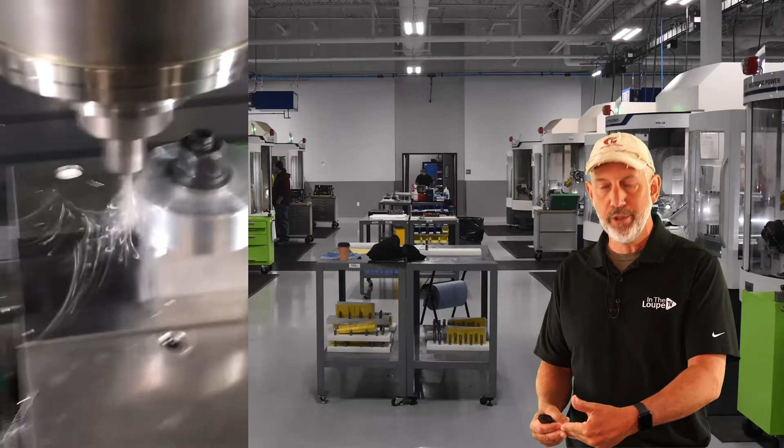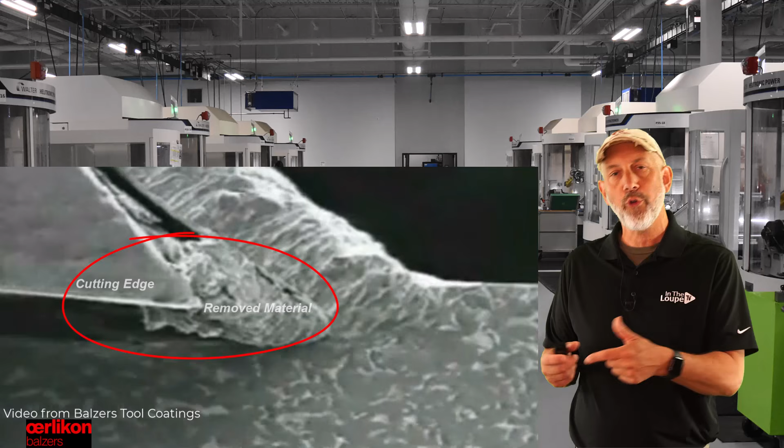It's very common. Basically, built up edge is when you're actually cutting a material with an end mill, a drill, a reamer, an indexable tool - it applies to everything, all kinds of materials. The material that you're cutting wants to weld itself or stick to the cutting edge. It's a huge problem and it's very detrimental to finishes and to tool life. And if we don't prevent it, we're gonna have a lot of problems. So understand, built up edge is where the material we're cutting wants to weld itself or stick to the original cutting edge of your tool, and therefore start building its own cutting edge that's not going to be conducive to giving you a good part, good finish, or long tool life. That's what built up edge is.

We're calling it B.U.E. for this episode. Okay, so what materials - you saw at the beginning of this, I asked everybody what kind of materials are you dealing with in your shop. It's good to understand this. So what types of materials, because it is a little specific, are more prone to getting built up edge? Well, these are your ductile materials, your soft, your gummy materials, and I'm going to run through a few of them.

Number one is aluminum, right? Aluminum, some of your 6000 series and stuff like that is going to be prone to built up edge. Your coppers, your 304 stainlesses when you start getting into steels, your nickels, your titaniums that aren't in the hardened state. The gummier, the more ductile the material is, the more it's going to be prone to sticking to the cutting edge. Think about that - I said gummy, ductile, softer. It's going to want to stick to the cutting edge.

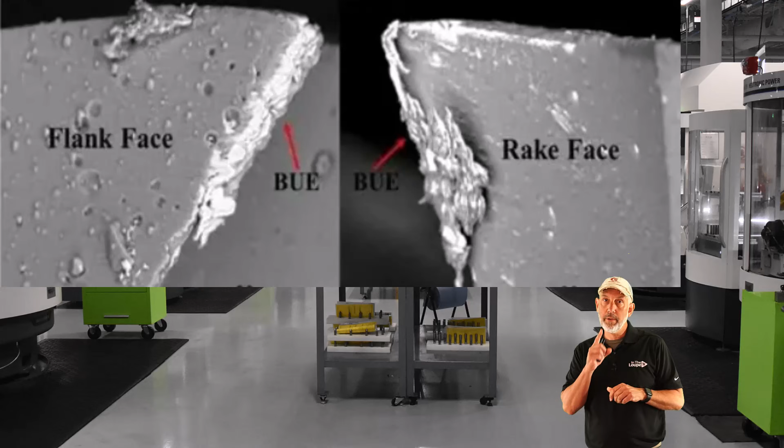So look at those types of materials if you're running them to kind of run through the process that we're going to run through today, to say: is built up edge a problem, and how do I need to prevent this? Because I am running one of those materials that's a little bit softer, a little bit gummier, and it's going to be conducive to getting a little bit more built up edge than some of these other materials. So just keep that in mind as we walk through how we combat this.

So how do you determine if you have a built up edge problem? Well, here's something I wanted to bring up to everybody - this is the things that I have to do at the spindle, which is why I teach you folks out there so you can learn the same stuff that I apply. So how do we know that built up edge is a problem?

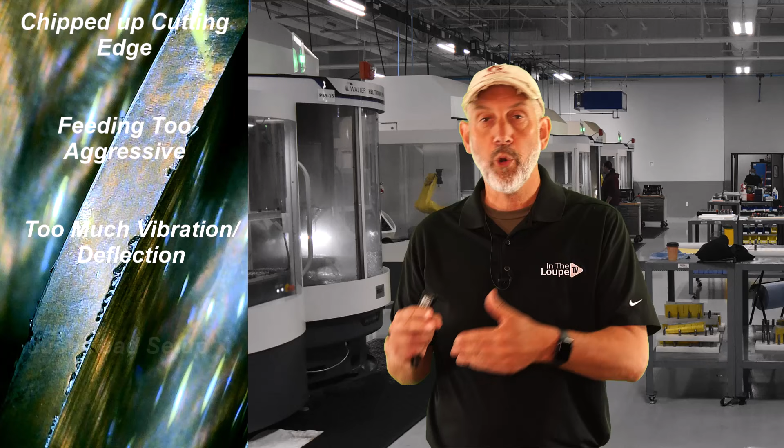Built-up edge disguises itself, folks. If you pull a tool out, it's very hard to tell if built-up edge was the issue. And you know what it disguises itself with? A chipped up cutting edge. If you pull a tool out of the spindle and look at it and it's got chipping down the cutting edge, what do you think right away? You think you're either feeding it too fast, you've got too much vibration in your spindle, or something's not set up right. That's not always the case.

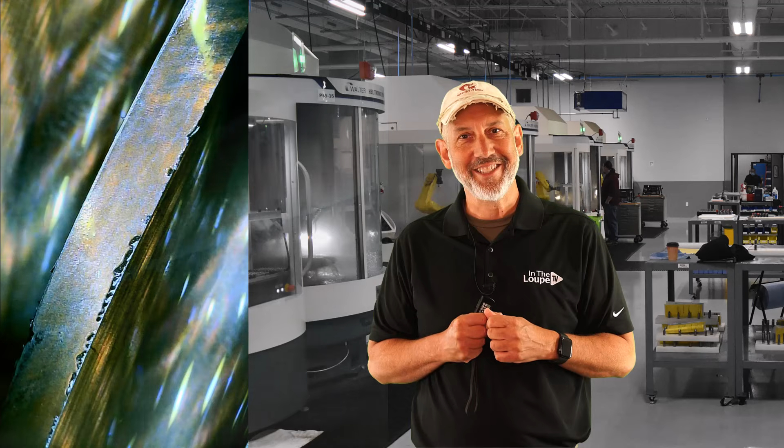You could be having built-up edge problems, and when that edge builds up so high, that material is going to flake off eventually of the cutting edge, and guess what it takes with it? It takes the cutting edge off. So if you wait with built-up edge till end of life, you might not know that you actually have a built-up edge problem.

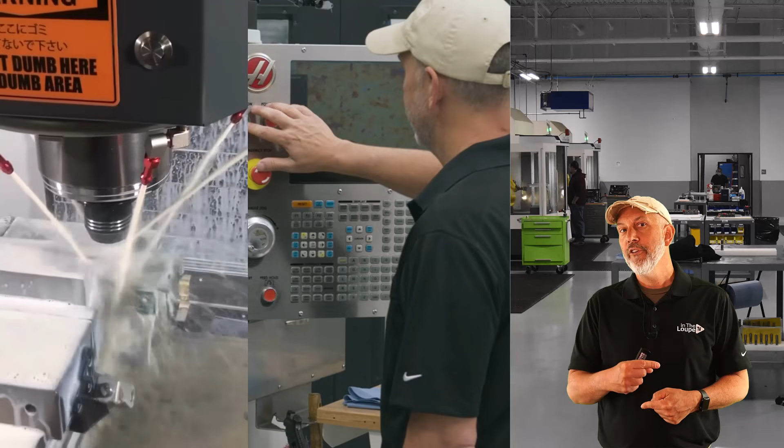The only way to determine if you have a built-up edge problem in your spindle, if you're running one of these materials that's prone to built-up edge, is you need to run for 5 minutes and pull that tool and look at it to see if it's starting to get built-up edge. If it's clean, put it back on the spindle. Run it again for another 5-10 minutes, look at it again. What you're trying to do is find out if there's a built-up edge problem before you run that tool to life and the whole cutting edge is chipped out.

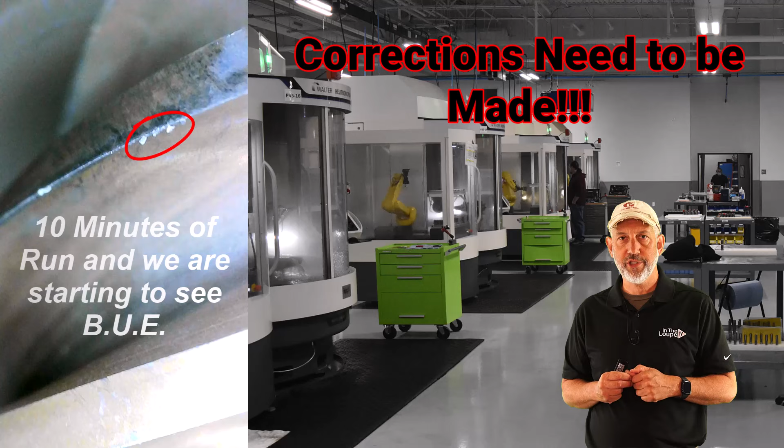We do it all the time when we're not aware whether or not built-up edge is causing our cutting edge to chip. We have to do it in segments. Pull that tool out, look at it about every 5-10 minutes of life, and see if there's material starting to stick to the cutting edge. This way, at end of life, when it's chipped out, you'll know that built-up edge was a problem.

So now let's talk about how do we fix that. How do we eliminate built-up edge at the spindle? Let's talk about some features on the cutting tool, and this applies across all cutting tools, that does not help built-up edge or is more prone to get you more built-up edge.

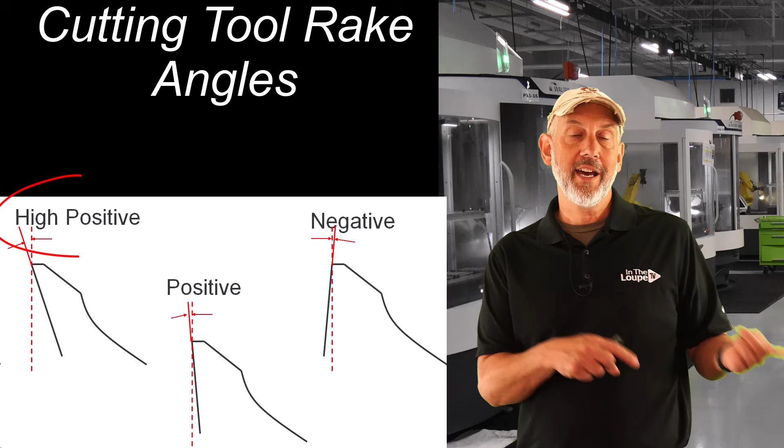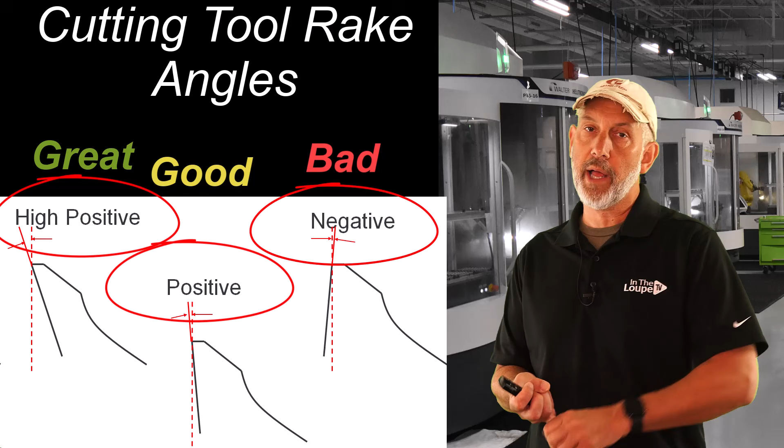Number one is rake angles on the tool. Geometry on the tool can either prevent or bring in built-up edge. So when you're running these gummy materials and you don't want built-up edge, you've got to look at material-specific end mills, drills, cutting tools - always the best way to go because they're designed for the material. You're looking at rake angles, you want it shear sharp. If you get a blunt edge or a flat rake angle, you're going to get more built-up edge. Plowing's not good - plowing's going to be conducive to built-up edge.

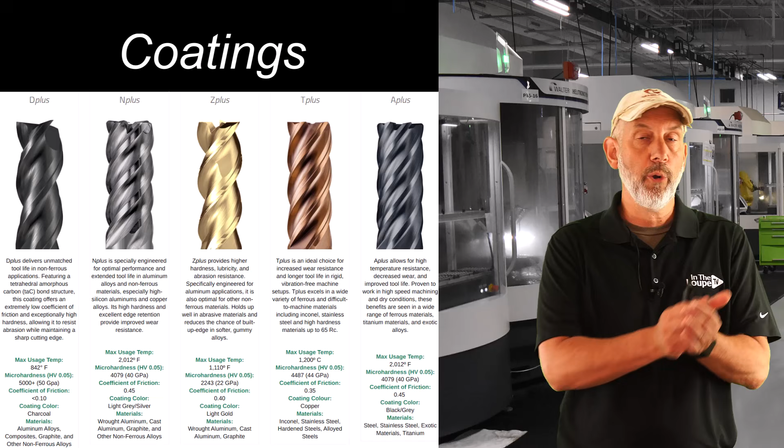Flute finish - what is that flute finish like? Built-up edge wants to stick to the material, right? It's not going to stick to the material if it's slicker than snot on a marble. If that's a really slick cutting edge, a slick flute, it's not going to stick to the material. Coatings - you have to have the right coatings for the right materials to build up that barrier that doesn't create that chemical reaction so that material welds to the cutting edge.

So the right coating is very important to put on your cutting tools to reduce built-up edge. Coolant, lubricity, MQL - always go with a coolant, especially in aluminums and stuff like that. Make sure you're using coolant, concentration is high enough, and if you add coolant in the right places and the right concentrations, it will help prevent built-up edge. So the first thing I'd say to reduce built-up edge, before we get into what you can do at the spindle - and trust me, I got some tips here, stick around - the best thing you can do is make sure you get material-specific end mills that have the right geometry that combats and stops the built-up edge from the beginning.

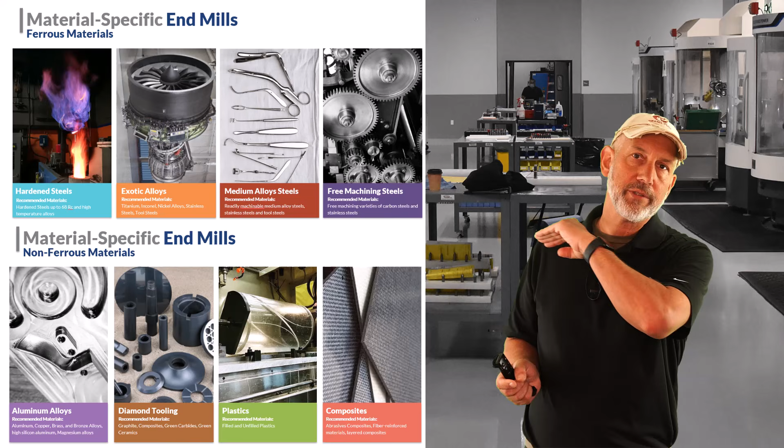But if you didn't get the right geometry, are there things you can do at the spindle? You would think right away, heat, right? If we have too much heat with the ductile material, we are going to create built-up edge. Believe it or not, raising the surface foot, getting more heat into your cutting edge when you have built-up edge, softens the material, anneals it, and lets it slide off the cutting edge. The danger zone with built-up edge is the middle surface foot. The lower is not productive - you don't want to be at the lower surface foot.

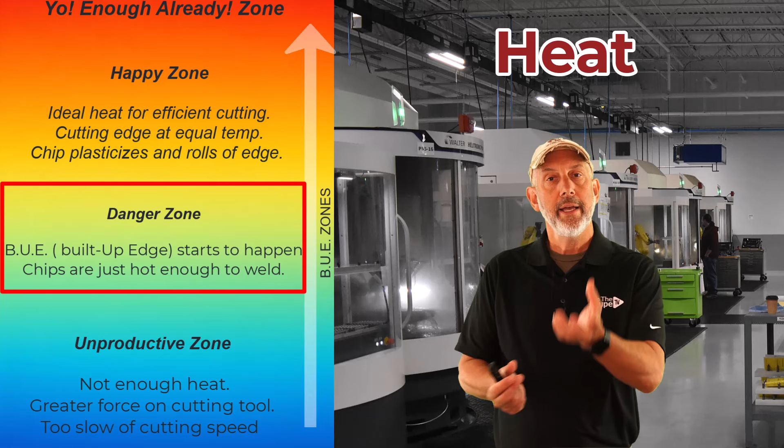The middle surface foot, where you're not at the right temperature with ductile materials, is where you're going to get that built-up edge. So what you need to do is bring your surface foot up. You anneal your chip, you get it softer, and when it's softer it slides off the cutting edge, eliminating built-up edge. So be mindful, don't bring the surface foot down, bring it up, and that's going to help prevent built-up edge. Got a little example I'm going to show you right now.

You might be saying to yourself, heat? If I get it hotter, it's going to weld to the cutting edge. Here's a perfect example, and I want to give a shout out to a gentleman named Joel Radner. He's actually my boss, but a very smart, intelligent cutting tool guy. He said this is a perfect example of how to combat built-up edge.

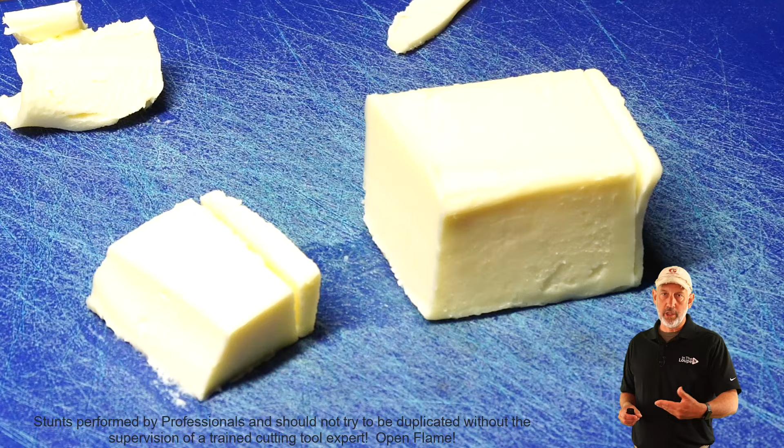If we take a look at this piece of butter - butter is a perfect example, it's a little colder, a little softer - and we take a butter knife like this. When I put this in the butter and pull the knife out, what happens? Now the knife is cold, so the butter wants to stick to that cutting edge, or the knife in this case. That's kind of similar to what you're going to get if you don't have the right temperature.

Now let me take that same stick of butter, and let me take this knife and heat it up a little bit. I'm going to put a little bit of flame on this, kind of heat it up. I'll speed it up a little bit.

Now when I get the knife hot - yeah, it's turning a little black, it's a thinner knife - when I get it hot and put it in the butter and pull it out, what just happened? You see how the butter didn't weld itself to the knife because I put heat into it. I made the material around it softer, therefore it did not stick to the knife.

That's a great example, isn't it? Shout out to Joel Radner again. That's kind of what's happening when you're actually getting built-up edge. Bring the temperature up at the cutting edge, soften the material around it, let it flow off that material, and you're going to be in really good shape to help eliminate built-up edge in all those materials.

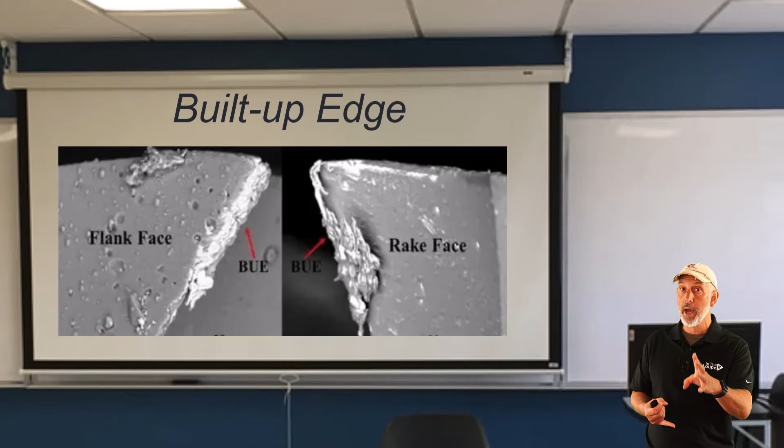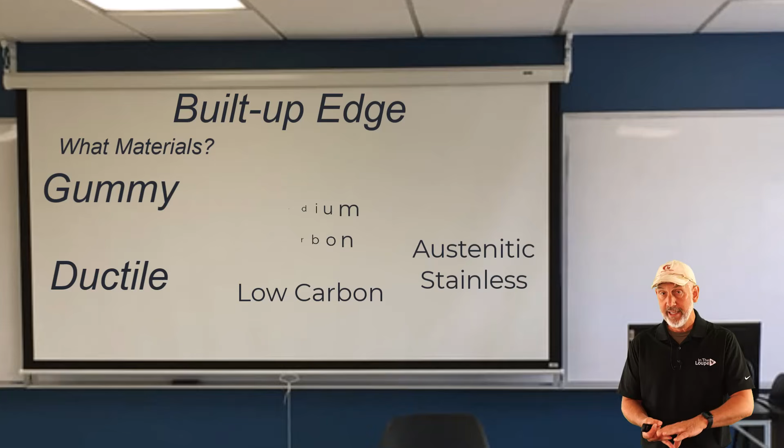So folks, it's recap time - it's been a while since I've done that. What we're talking about is built-up edge. It's a big problem with cutting tools, it doesn't give you the tool life you need. What materials have built-up edge? Well, it's your gummy materials, your ductile materials - aluminums, coppers, 1018s, medium carbons, low carbons, 300 series stainless, titaniums, nickel alloys in the softer state. That stuff wants to weld to the cutting edge.

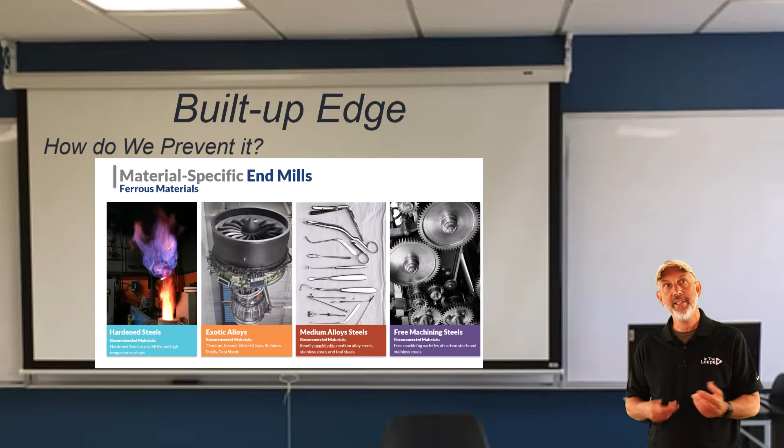How do we prevent it? Well, number one, make sure you've got the right geometry. Material-specific design gives you the right rake angles, the right coating, the right geometry - that's going to prevent built-up edge. If you still get built-up edge, what do you do? Well, we need to definitely bring the heat up at the cutting edge. Bring your surface foot up, plasticize that chip, get it a little softer, let it roll off.

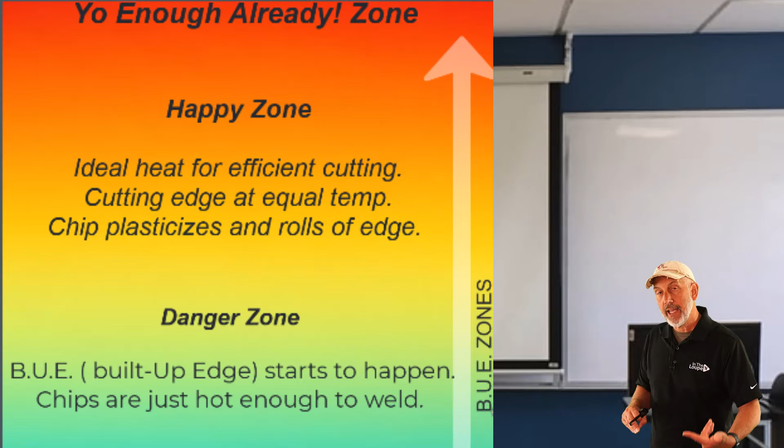Remember the butter experiment - let it roll off that cutting edge a little easier, you're going to get less built-up edge, you'll be in good shape. Also, I didn't mention this before: don't rub your material. Make sure you make a big chip, let that cutting edge do what it needs to do, roll that chip, let it slide off the cutting edge. Make sure the geometry has a nice flowing flute, and everything will come out good. This is how you prevent built-up edge.